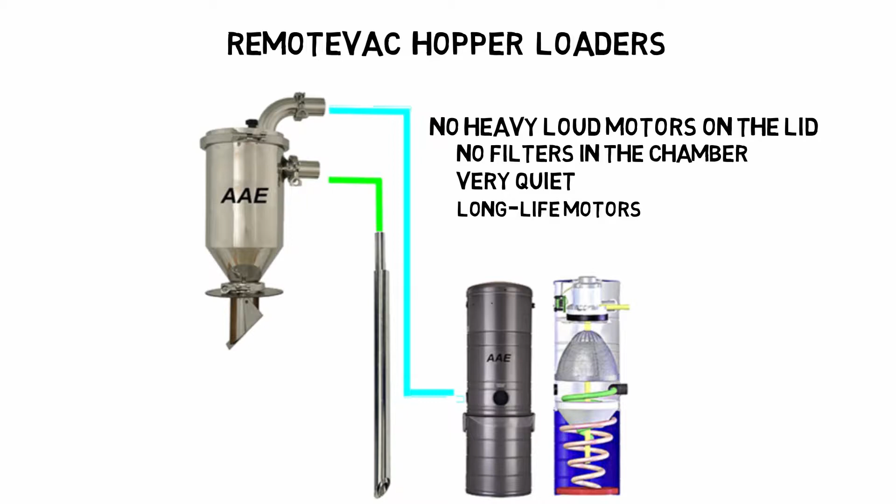The vacs and filters are at floor level for easy access. You will have reduced downtime. The vac can be switched out without interrupting production for cleaning.

Now, let's see how it works. First, you have the vacuum chamber. It is where you draw the material to above your hopper.

At the bottom of the chamber is a material switch that starts the cycle when the material falls below the chamber. When the switch calls for material, the vac starts. It runs for a set number of seconds to fill the chamber.

When the vac starts, the vacuum causes the flapper valve to close. Once the flapper closes, the material starts to flow from the wand to the chamber. When the vac stops, the flapper opens and the material falls into the hopper.

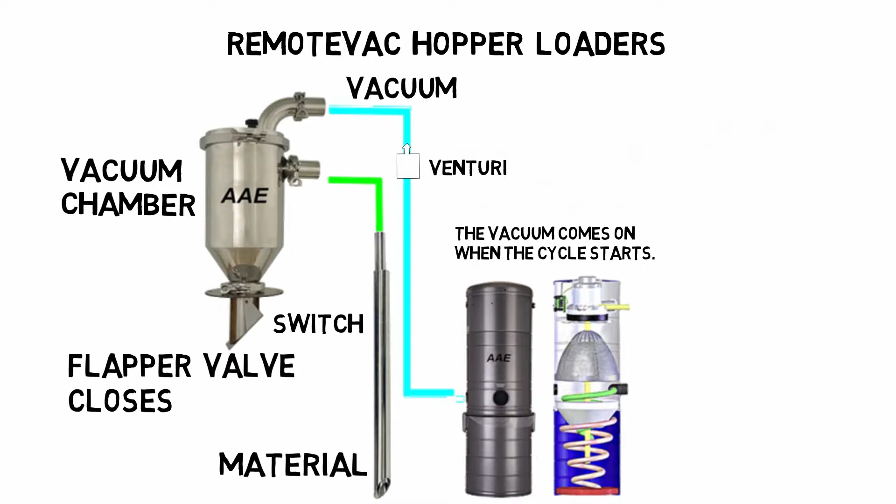As the material falls, the venturi reverses the airflow in the chamber, blowing off any dust that may have accumulated on the screen. A RemoteVac can convey up to 1,200 pounds per hour. They are best suited for applications under 800 pounds per hour.

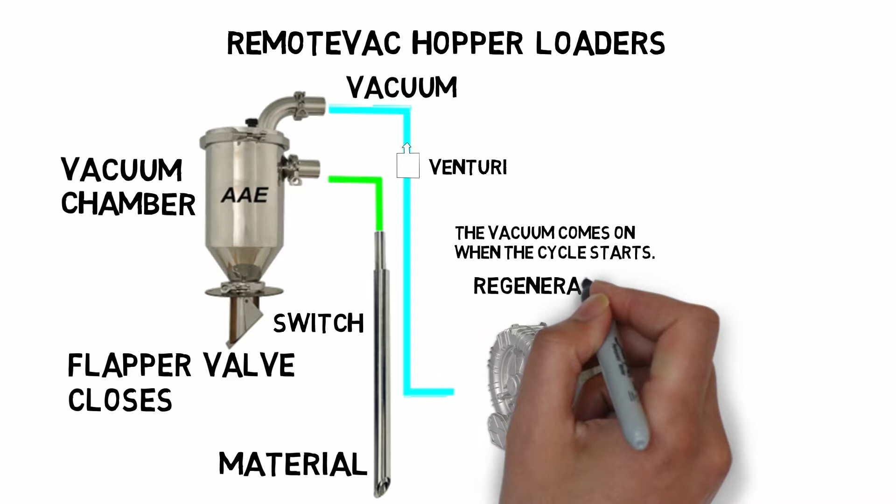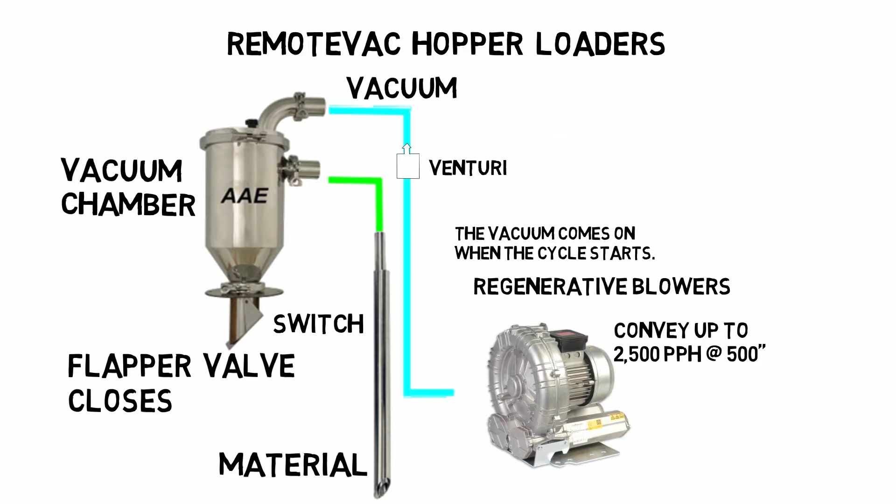Regenerative blowers provide more vacuum. They can convey up to 2,500 pounds per hour at up to 500 feet. Their simple design and heavy-duty motor can provide years of high-capacity service.

Now let's look at the vacuum chamber. The vacuum chamber is the heart of your system. RemoteVac chambers are constructed of food-grade stainless steel.

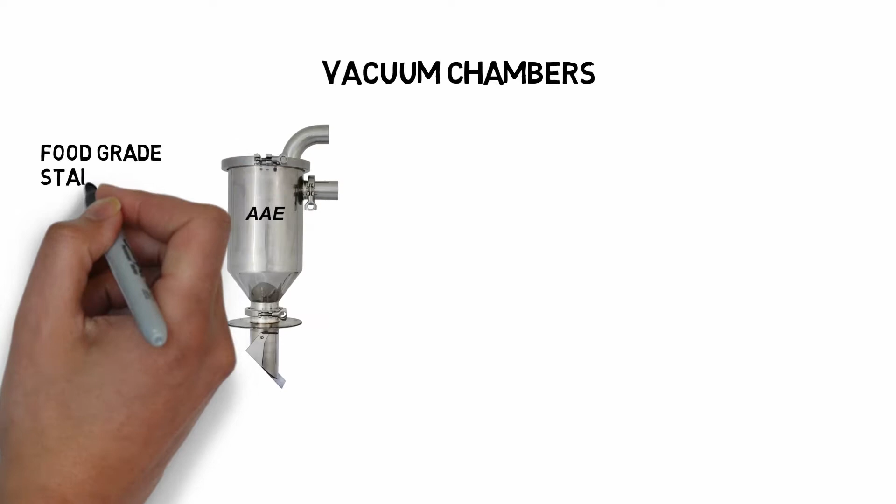In fact, a large portion of our sales are to the food industry. That means they are polished on the inside with no lips or ledges. In short, they are virtually self-cleaning.

We use a center-weighted flapper. It does not require an adjustment for materials with different densities, and it naturally falls into the correct position.

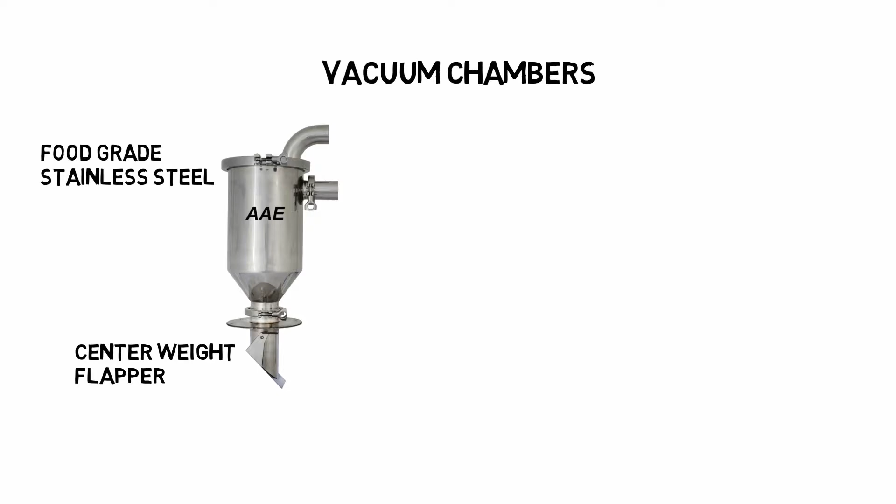Our material switch features a magnet sensor. We have no mercury in our switch.

Our clamp-on system uses heavy clamps and machined flanges. Our seals are rated for over 150 psi. You won't have any dust leaking from our chambers.

You can easily rotate our chamber so that the inlet is facing the correct direction. Other chambers have limited orientation and must be disassembled.

With our clamp-on material inlet, you will not have to fight with the hose every time you want to take it off. You can replace the inlet and deflector if needed.

We use a reinforced stainless steel screen. We reverse the airflow to clean the screen after each cycle.

Notice the 1/4-inch stainless steel plate the lid is made of. It has a machined groove to match the injection molded gasket.

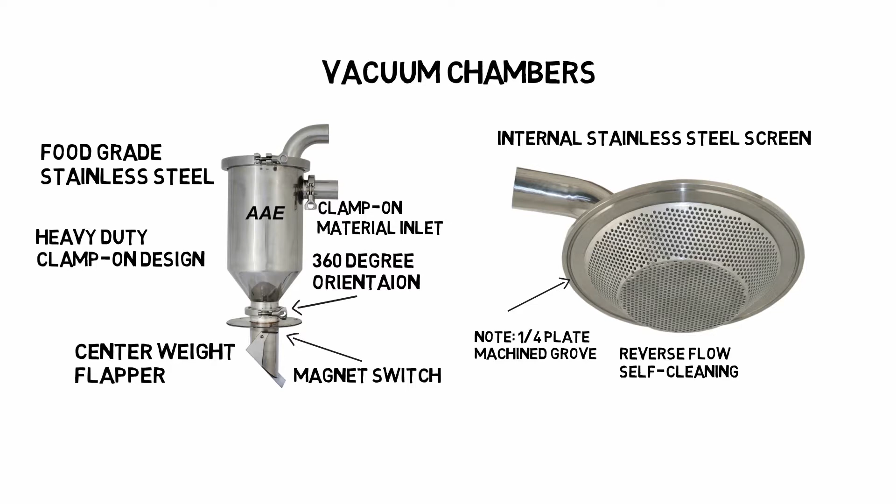We offer bag filters for fine particles. Remember to select the filter based on the smallest particle size. The bag filters snap in for quick access.

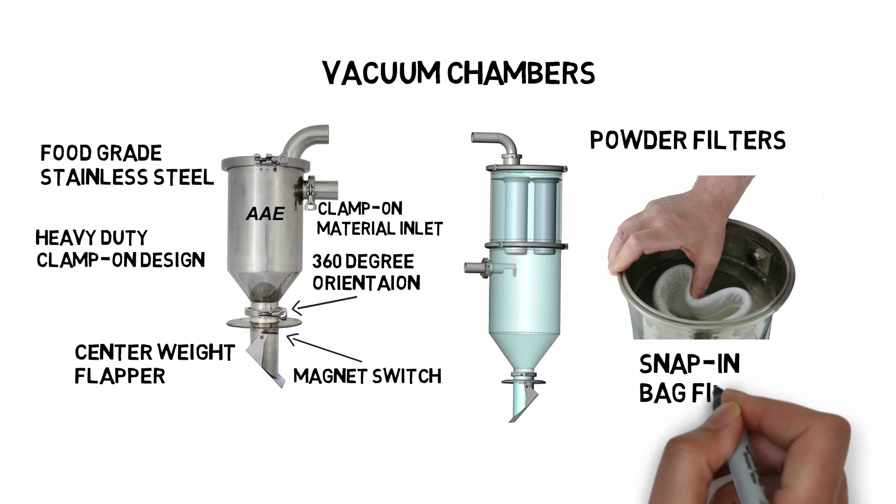Here is what we don't do. We have no loud, heavy motors on the lid. Our filters are not sandwiched between the lid and the chamber. Filters sandwiched between the lid and chamber are impossible to clean without getting dust all over your machine.

We have no seams in our chambers. They are impossible to clean. We never use mercury switches due to environmental and safety concerns.

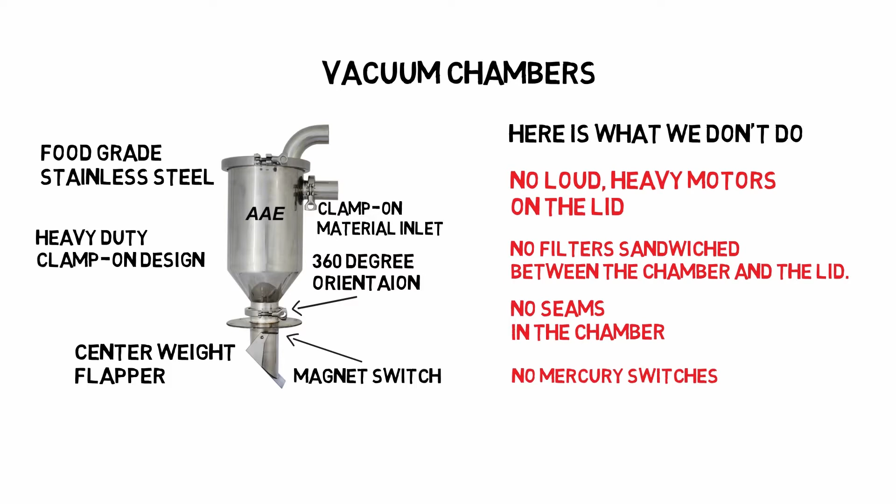We are the only company to offer remote vacs. RemoteVac units have extremely long life motors. As I pointed out earlier, we have only replaced 3 motors in the last 6 years.

They are very quiet. They have a large self-cleaning filter. They are the only vacuum motor system that offers access at floor level. They are also the only vacuum loader system with HEPA filters as standard.

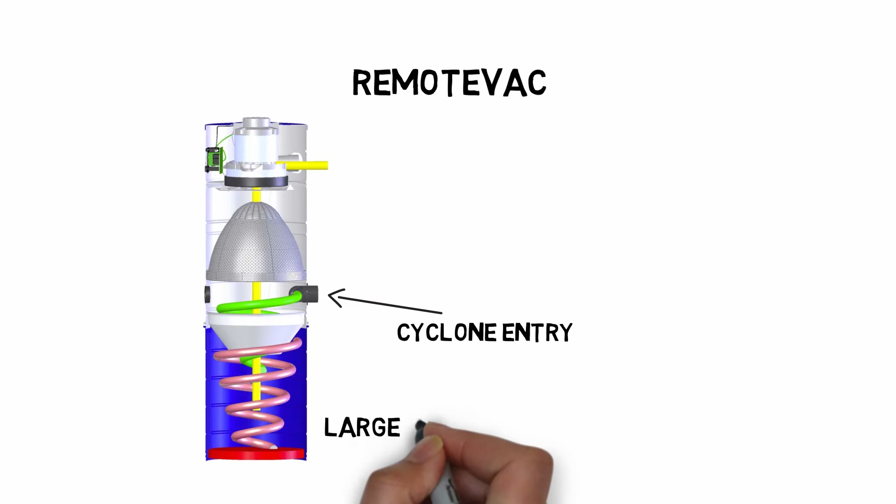The air enters the vac into a cyclone to help prevent dust from getting to the filter. The dust falls into a large canister. That will reduce the need to empty the canister.

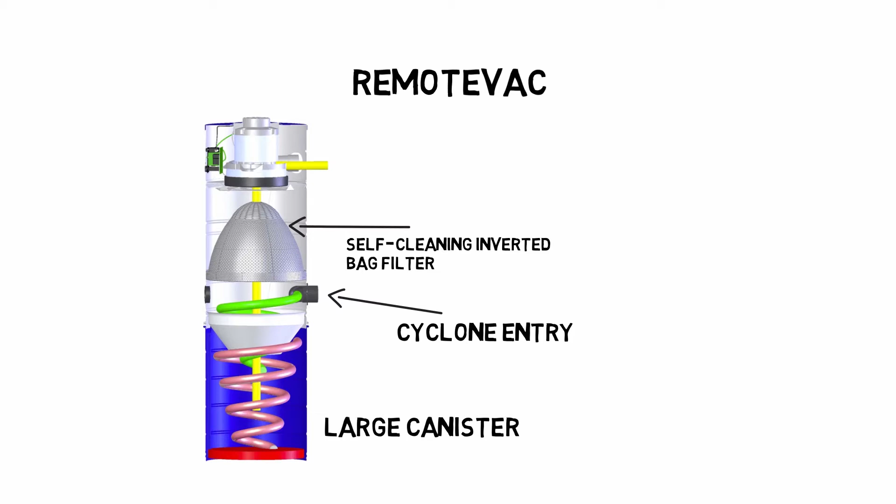A large cone-shaped filter is sucked up when under vacuum. Once the vacuum is released, a weight causes it to invert, dumping the fines into the canister.

At the top, you have the long-life motor and the soundproofing. As a result, the sound level is under 76.

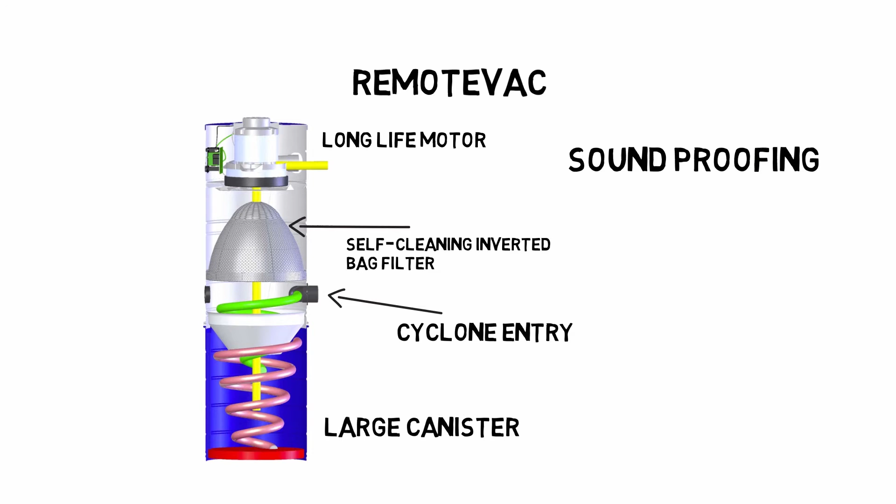Review the brochure or contact us to make sure you select the right chamber. There is a separate video on vacuum chamber design that covers details that are important.

If you have any questions, please give us a call or send us an email. Are you ready to learn more about our products?